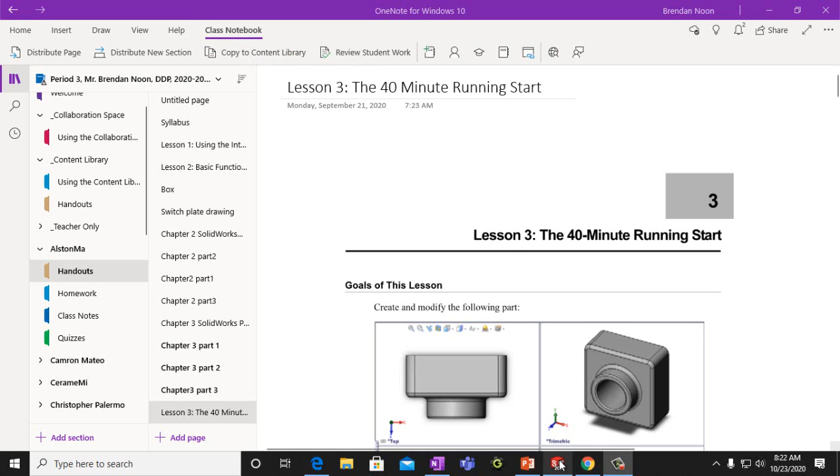Now remember, Lesson 3, we go to our topics page under our class web page, and the lessons are in the student workbook. Chapters are in the Power Guide for Beginners. Lessons are in the student workbook. And you can see that for Lesson 3, there's a video.

And we'll be making this, what looks like, a camera face.

So this is Lesson 3, SOLIDWORKS Teacher's Guide. We start with the base feature, the first feature that is created. It's the foundation of the part. The base feature geometry for the box is an extrusion, named Extrude 1. Keep the base feature simple.

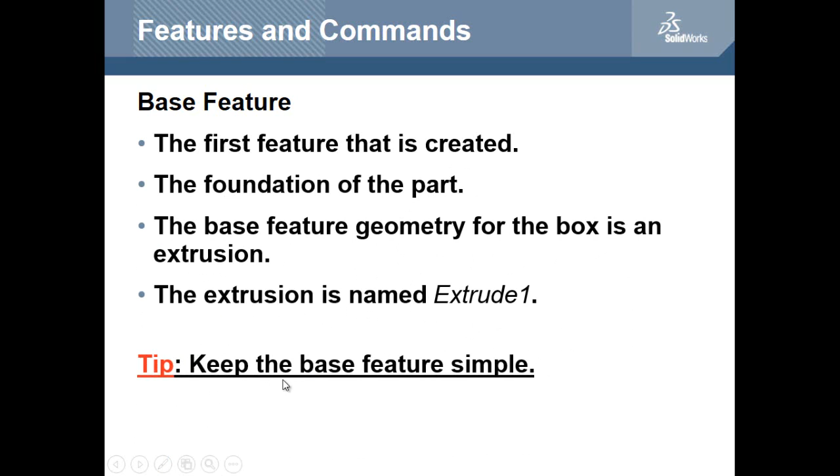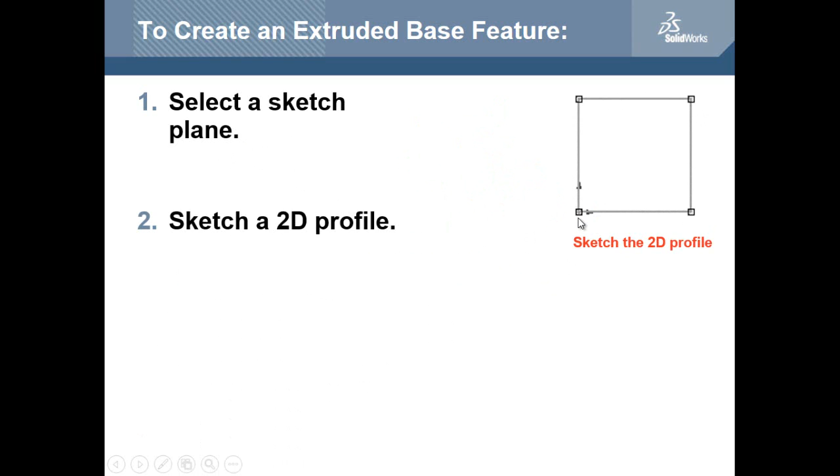We select a sketch plane, the front plane, and then we sketch a two-dimensional profile. For this, it'll be a box started at the origin point where our X, Y, and Z coordinates come together. Then we extrude the sketch perpendicular to the sketch plane. So this is what it'll look like when extruded.

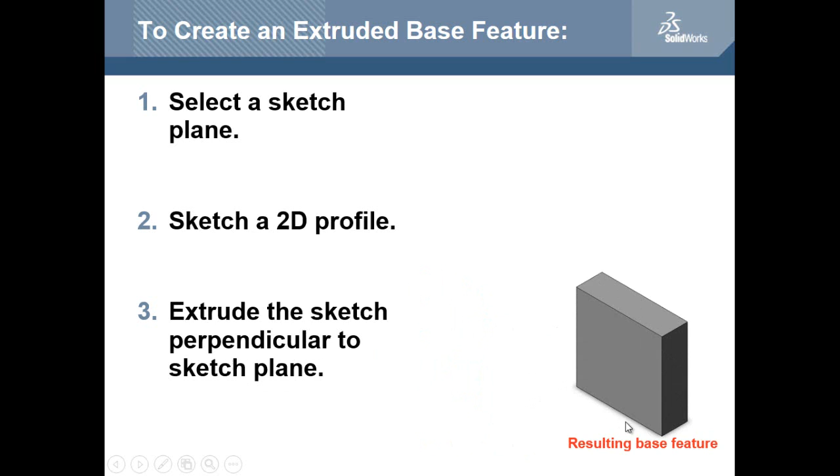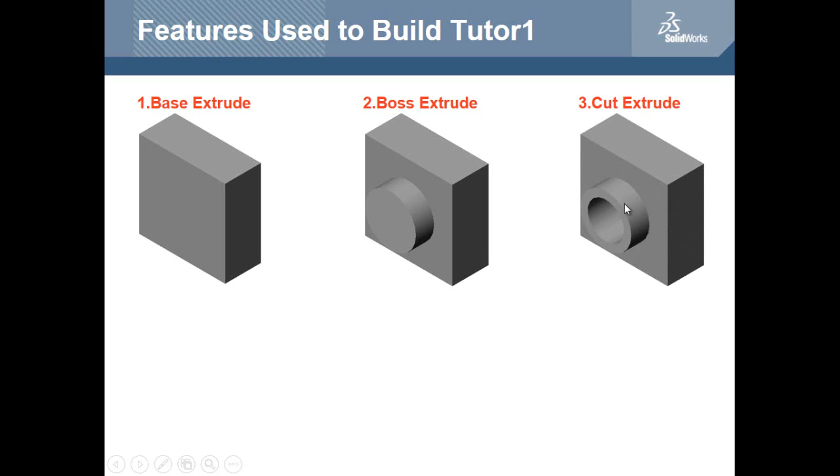And then the resulting base feature is found. We have the base feature, and then we're going to draw a circle and extrude that, and we're going to have the boss extrude. And then we have the cut extrude, where we cut a hole through the entire base. And then we have the fillets, which round all the edges around. And then we have the shell, which empties it. And then we have our completed part.

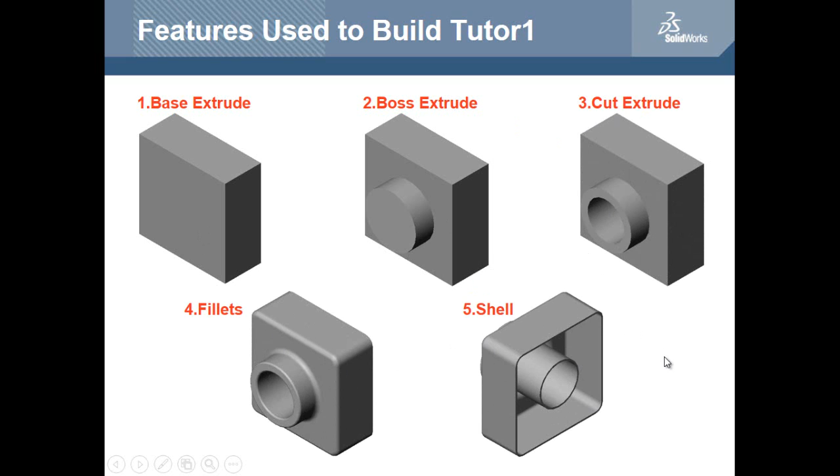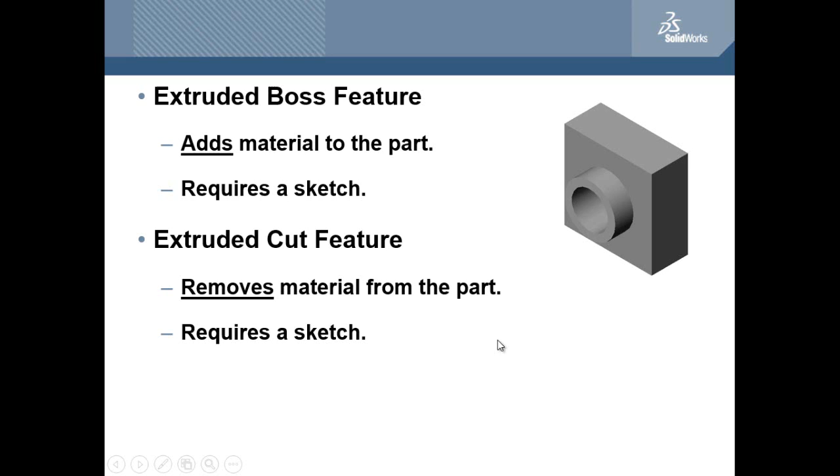Our extruded boss feature adds material to the part. It requires a sketch. First you sketch the circle, and then you extrude boss. Extrude cut feature removes material from the part and requires a sketch. So then you're going to draw another circle, and extrude through it. This can all be seen in the video that accompanies the lesson.

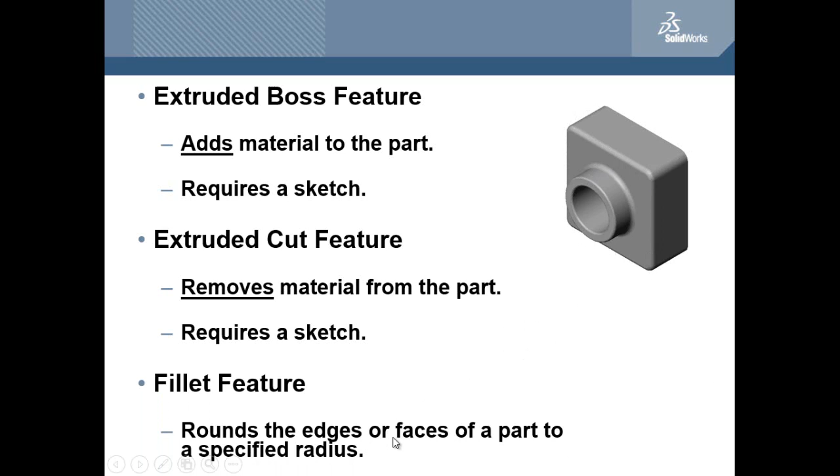The fillet feature rounds the edges, so we can see all the edges were rounded, or faces of a part to the specified radius.

The shell feature removes material from the selected face. Creates a hollow block from a solid block. Very useful for thin-walled plastic parts. You are required to specify a wall thickness when using the shell feature.

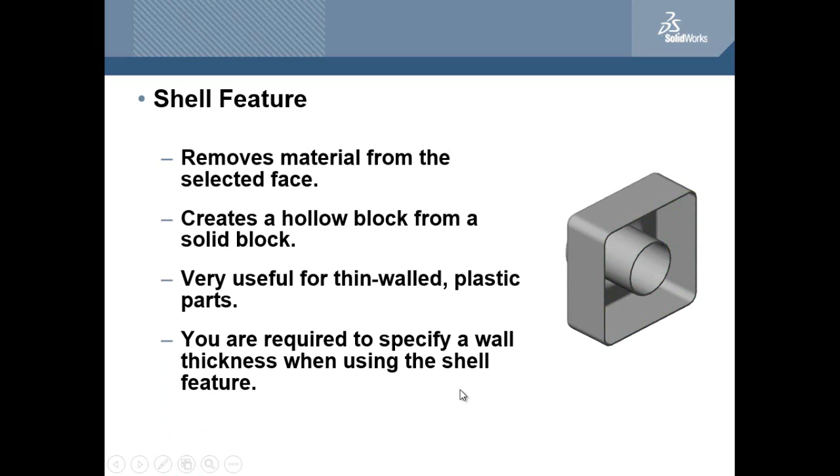Magnify or reduce the view of a model in the graphics area. You can zoom to fit, which displays the part and fills the current window. Zoom to area zooms in a portion of the view that you select by dragging a bounding box.

Zoom in and out: drag the pointer upward to zoom in, drag the pointer downward to zoom out. These are all helpful things to do while you're creating your parts to specific measurements. Zoom to selection: the view zooms so that the selected object fills the window.

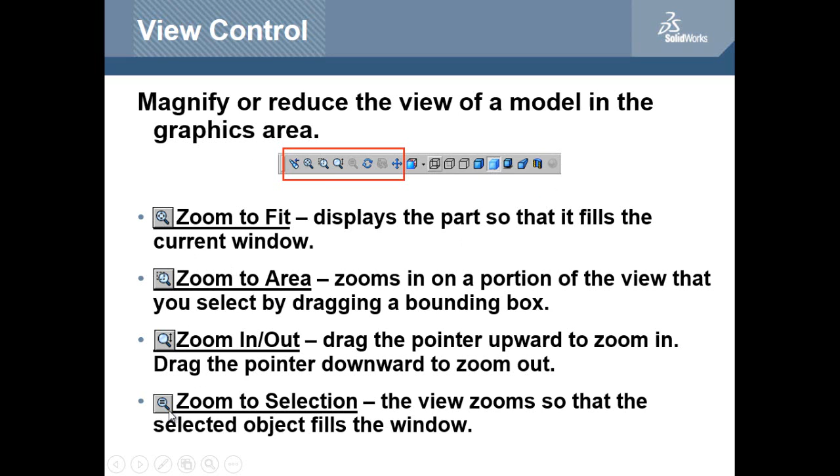So this is all on our taskbars up here. We have zoom to fit, zoom to area, you click and drag. Zoom in and out is by rolling your mouse back and forth. And zoom to selection has a little equal sign in it.

Display modes, our display modes are over here, illustrate the part for various display modes. This is a wireframe. This is hidden lines visible, so you can see the back part is hidden. This is hidden lines removed. This is shaded, and this is shaded with edges.

This is what the boxes look like when you select these, and this is what your part, or your base feature, will look like if you select any of these to do your work.

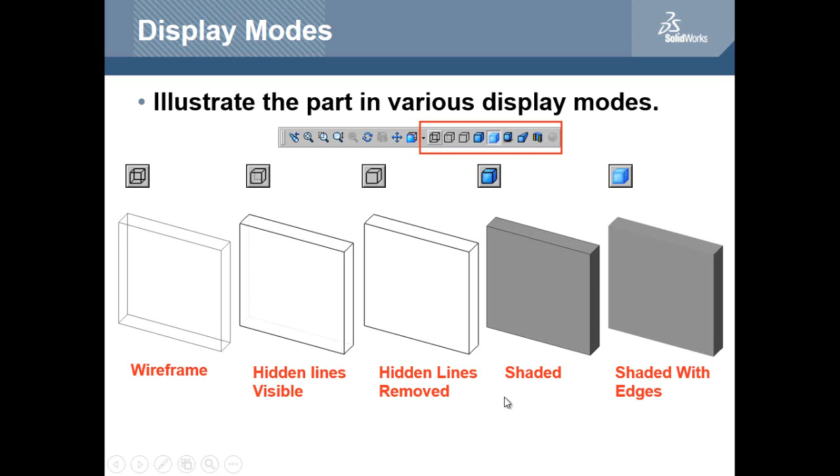Standard views. We have our front, top, right, back, left, bottom. All right, so this is an isometric view of a part that could be created.

And then here's our views. We have our front view of this item. This is the front view, so you can see it here. This is the right view from this angle. This is the top view. This is the bottom view. This is the back view. And this is the left view. And that's what your part would look like from those angles.

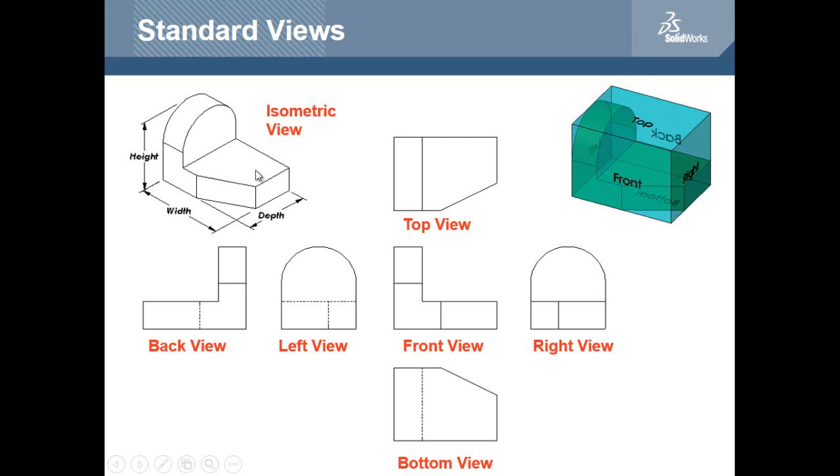And then you can also pick different isometric angles. Change the view display to correspond to one of the standard view orientations. Here's our standard views, and then here's our isometric views.

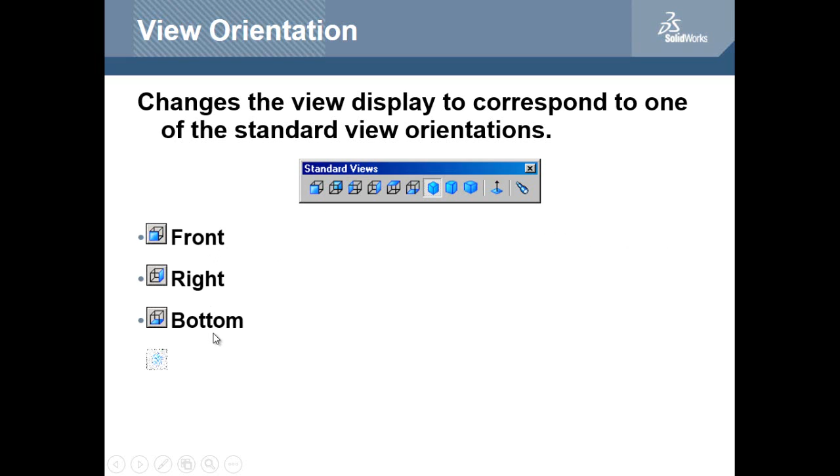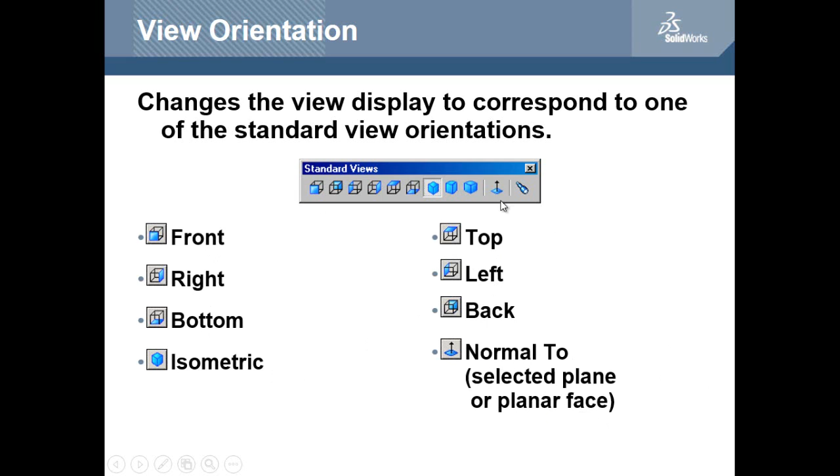Front, right, bottom, isometric, top, left, back, normal to selected plane or planar face. So whatever plane we have selected, when you click on this, it'll have a normal view to that selected plane.

So once again, here's our different views, and these are the corresponding buttons that we would click to get those views.

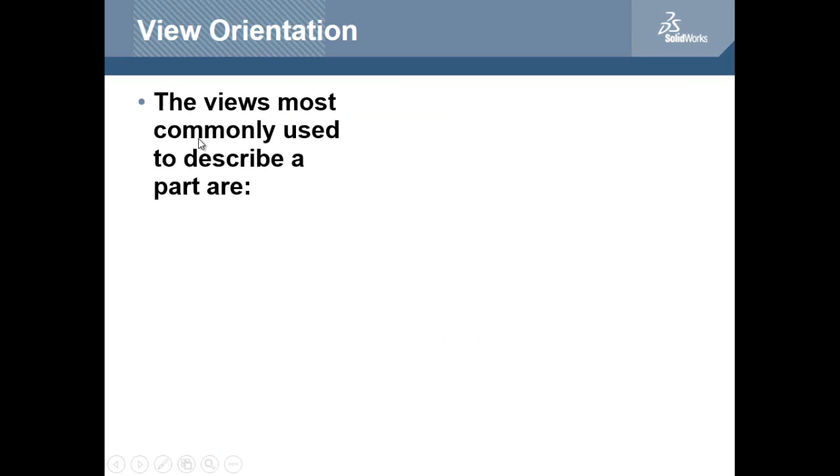The views most commonly used to describe a part are top view, front view, right view, and isometric. So here's our top view, here's our right view, here's our front view, and here's our isometric. Top, front, right, isometric.

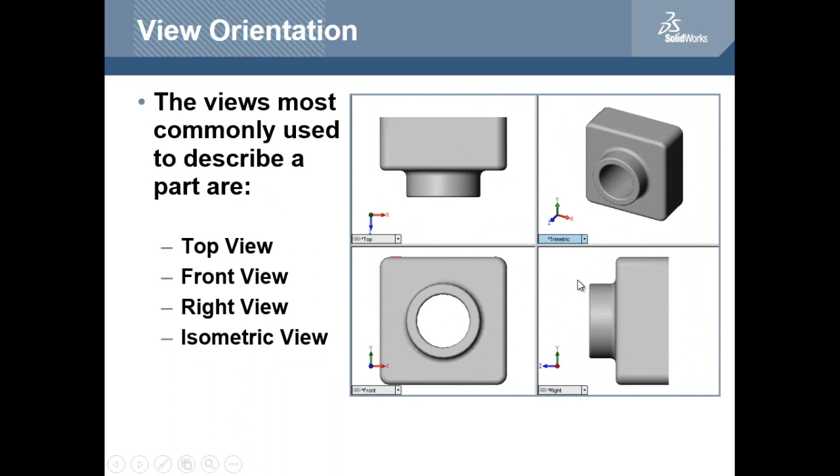Default planes: we have the front, top, and right planes. So we have the front, we have our right, we have our top plane.

These correspond to the standard principal drawing views. Front equals front or back view. Top is top or bottom view. Right is right or left view.

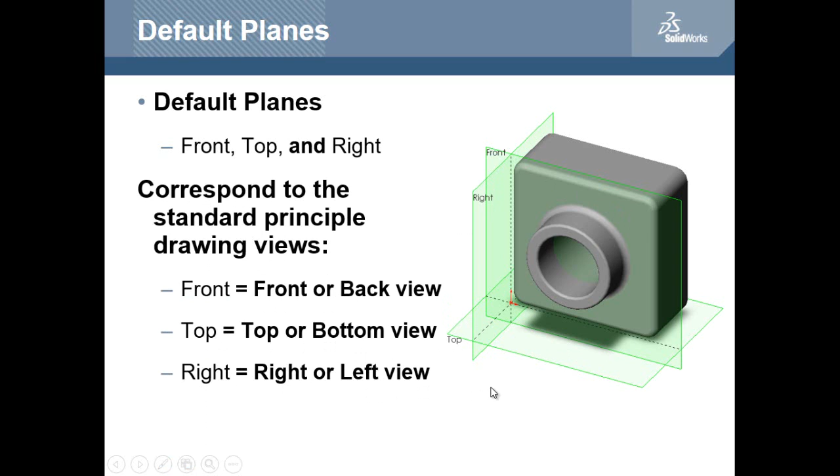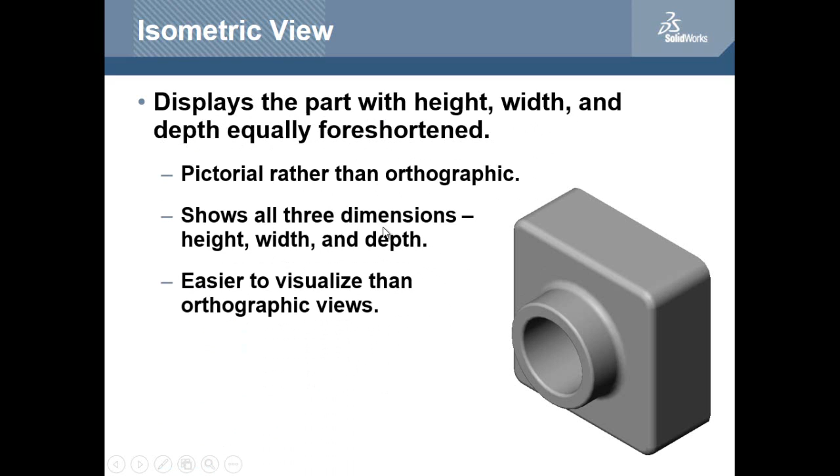Displays the part with height, width, and depth equally foreshortened. Pictorial rather than orthographic, shows all three dimensions: height, width, and depth. This is isometric, easier to visualize than orthographic views.

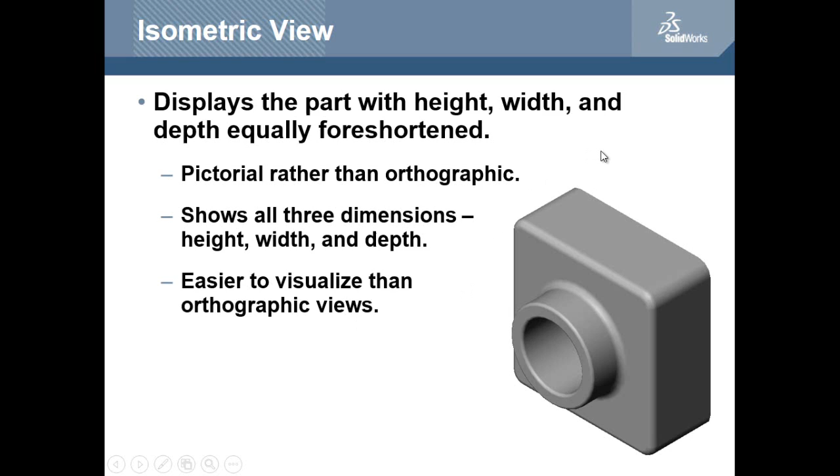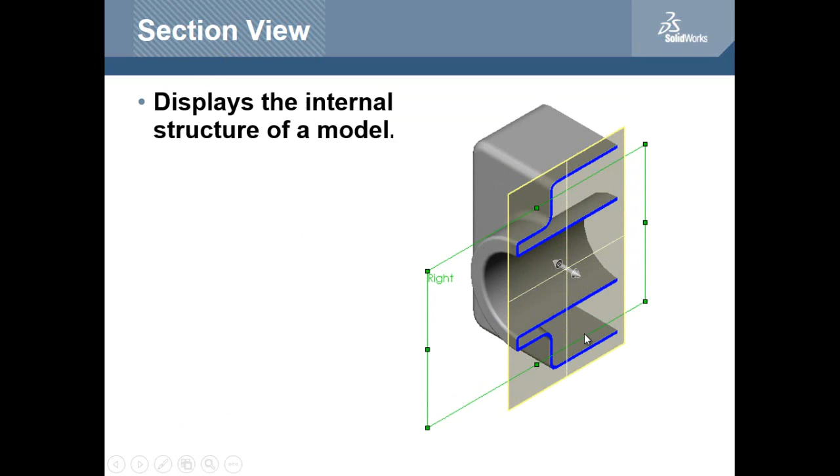We have a section view that displays the internal structure of the model. So there's a section view that you can create, and you can move your section through, and it shows a cross section. Requires a section cutting plane.

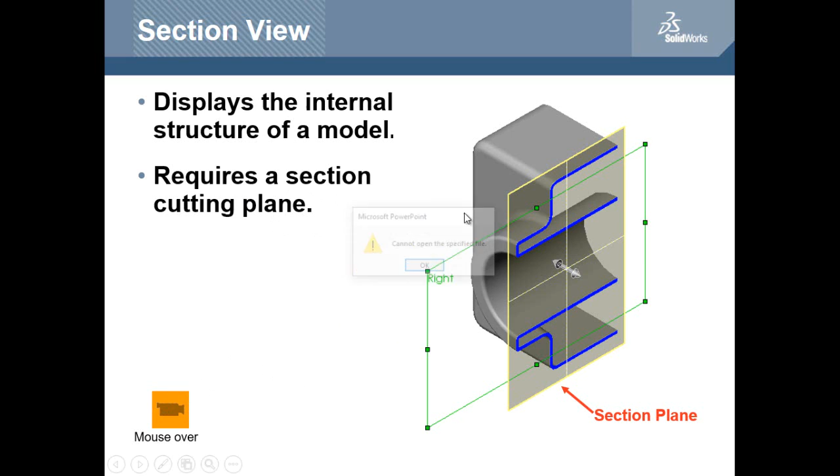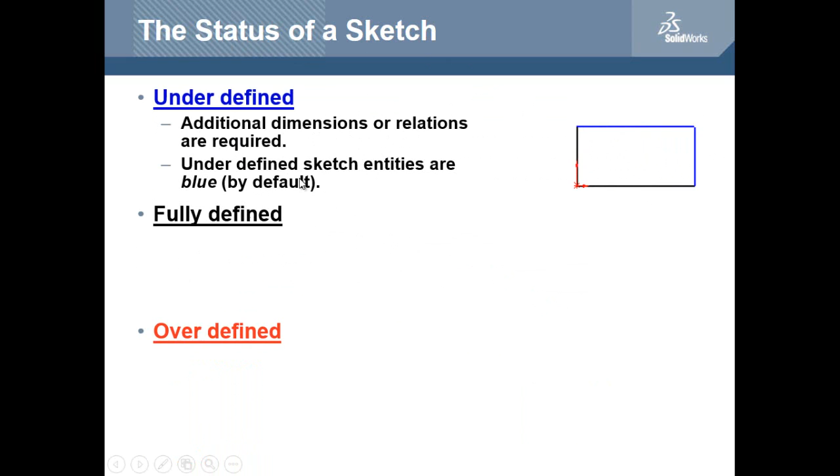The status of the sketch: underdefined means additional dimensions or relations are required. Underdefined sketch entities are blue by default. So we have blue here.

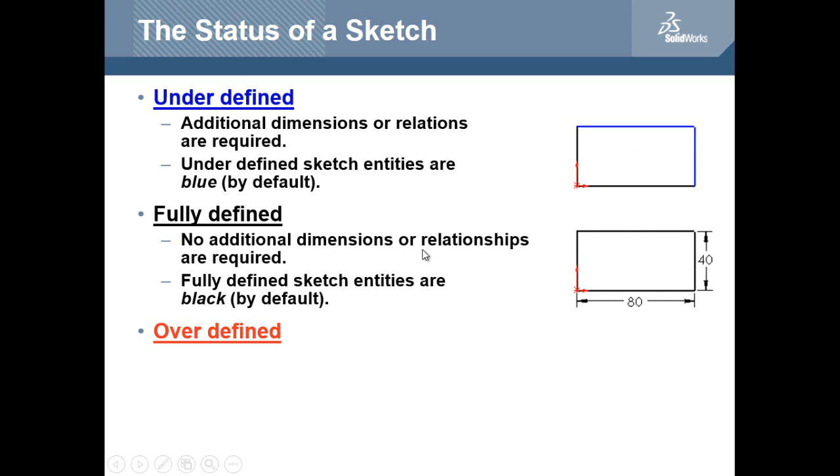We have something that's not connected. Fully defined means no additional dimensions or relations are required. Fully defined sketch entities are black by default.

Overdefined contains conflicting dimensions or relations, or both. Overdefined sketch entities are red by default.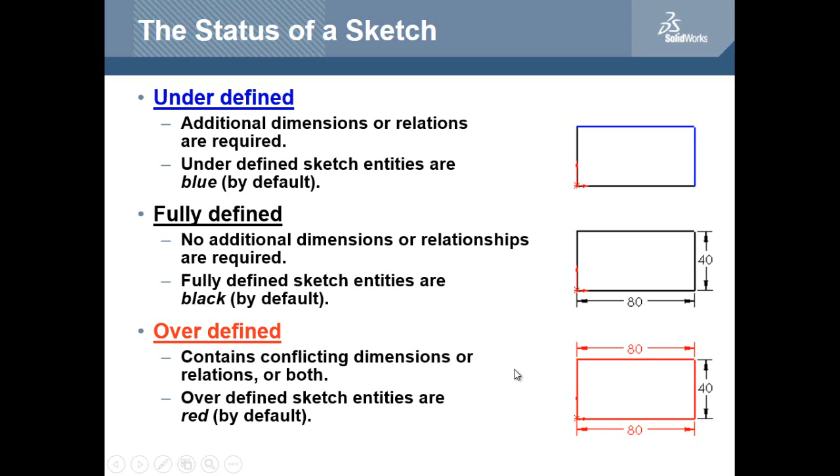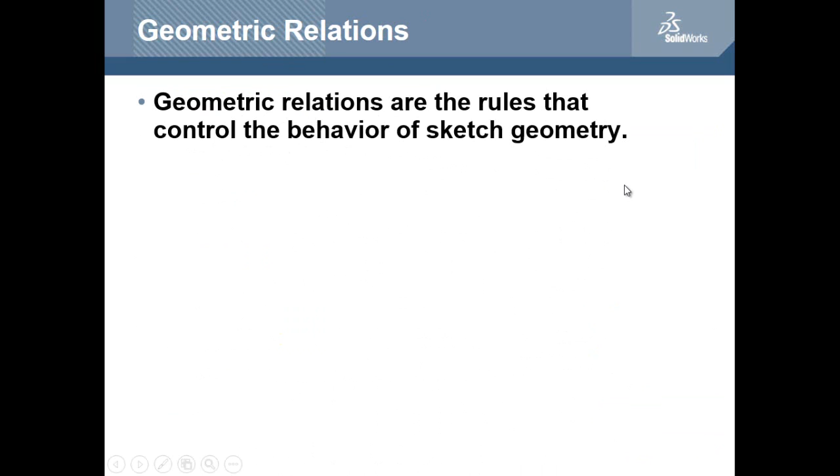Geometric relations are the rules that control the behavior of sketch geometry. Geometric relations help capture design intent.

For example, the sketch circle is concentric with the circular edge of the extruded boss feature. Concentric means the center of one circle is equal to the center of the other circle. This inner circle is concentric to that outer circle. In a concentric relation, selected entities have the same center point.

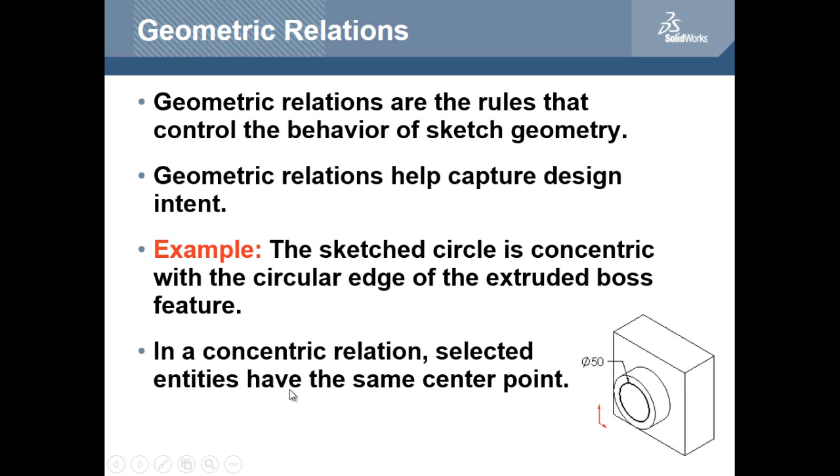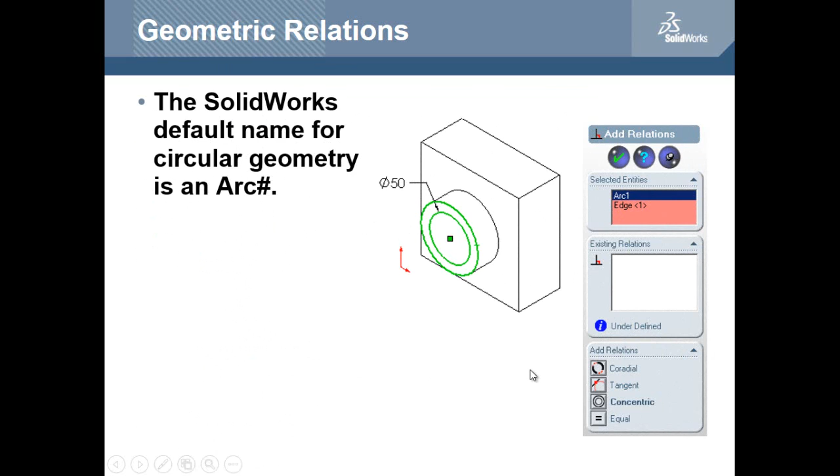Geometric relations: the SOLIDWORKS default name for circular geometry is an arc number. SOLIDWORKS treats circles as 360-degree arcs.